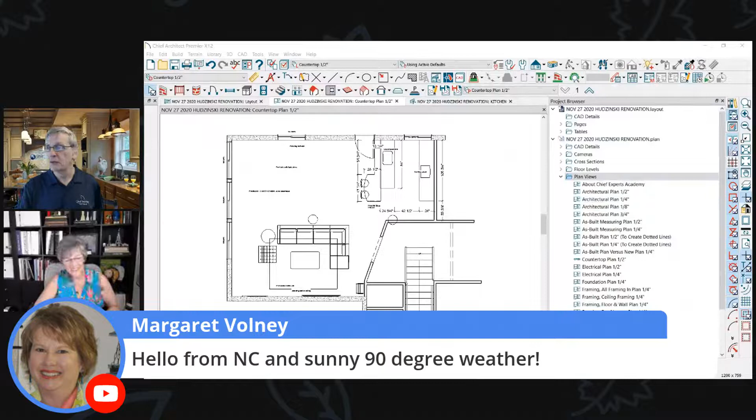I understand, one of the cool things about teaching the software, one of my comments I think I use too often is that you weren't born learning. You weren't born knowing how to use the software. And the other thing to keep in mind is right now there's over 1,200 different icons in the software, and that doesn't even include a lot of these pull downs here that have other functions in them. So, and then you've got the plan views, you've got the layout views, you've got your CAD detail views.

There's a lot going on in this program now, and they keep adding things to it, so it's a challenge to keep up with. I mean, this is what I do all day long, I work on this software. And even at that, it's just like, yeah, I still find myself, oh yeah, I forgot about that, now I can start using it again. So it's just so many things going on in it, which is good and bad all at the same time. I remember back in the day when the program was a little bit simpler, we could have a 2-day class and I could pretty much cover everything.

Now, we barely scratch the surface when we get into a 2-day class. So it's just what it is, and we just keep working with it. But it's just phenomenal what it can do and how quickly you can crank things out.

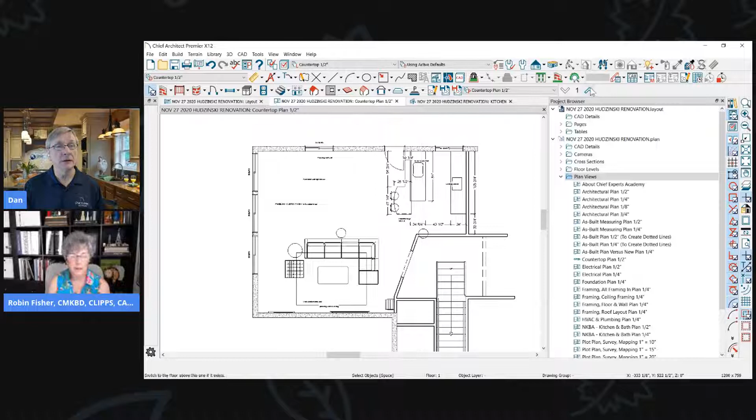So tell me a little bit about this plan. How did this plan originate? So this is a 1970s house with a daylight basement.

He's actually my integrator. When we moved into our house, we made it into a smart house, and Mark and I met at a conference a few years ago, and then he came over, and so now I'm doing his house, right?

So it's the whole main floor, the whole public space of the main floor, from the entry, living room, dining room, the kitchen, and then downstairs, which is a party room. So there's a full kitchen downstairs on the first floor, and on the basement level is a full floor, working kitchen and everything. She's a huge cook.

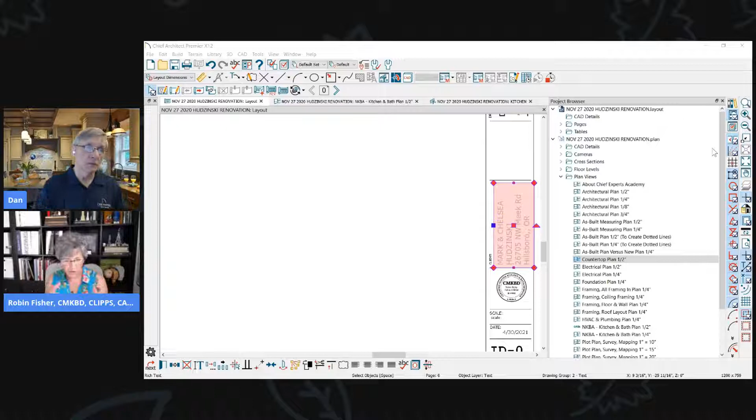She cooks all the time. It's a big deal. They have a small farm, so they raise a lot of their own fruits and vegetables. This is totally an Oregon thing, right? Mm-hmm. They raise a lot of their own foods, so they're really big on canning and preserving food.

So the downstairs kitchen is more where she does her canning in the summertime when it's really hot, but then they do entertain a lot. So it's a whole full working wet bar downstairs. And then upstairs is a really detailed functional kitchen.

All right, cool. So you came into this project. What were some of the... we've been talking about this quite a bit lately. Robin's actually going to start doing some kitchen classes with Chief Experts Academy with me. So I'm really excited about that. Looking forward to do that.

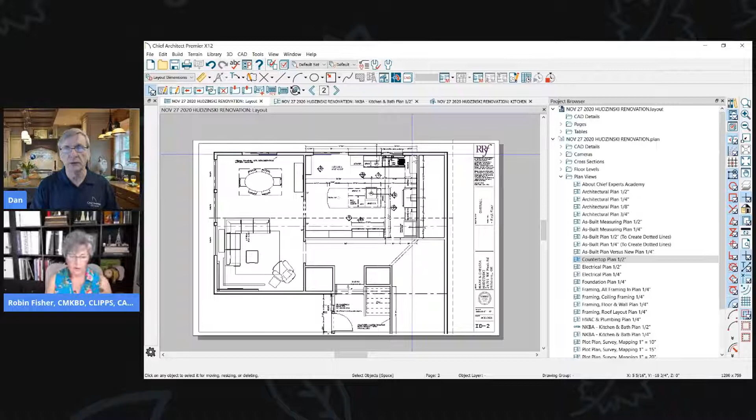And part of what we'll talk about in some of those classes is the mindset of what you go into these projects with. What do you think about when you meet a client and you go, 'Well, let me just design this wonderful kitchen for you and you're going to like it, right?' Isn't that how it works? No, not really. Not quite.

But so where do you start in that thought process? So prior to me meeting a client for the first time, I knew Mark pretty well beforehand. But before I meet somebody, first, I do a lifestyle questionnaire. So I send them an email with it, it's about a 6-page questionnaire, and it's really dealing with lifestyle issues.

Okay, how do you grocery shop? What kind of physical limitations? Is the house expanding or contracting? It's really not about pretties. It's not about how I want the space to look. The space to look is either Pinterest or Houzz or whatever. Okay, it's a contemporary style home.

So do you do this the first time you meet a client? Take their address? I should more than I do. I typically just go to Zillow or something like that and look at it that way. But I don't go to Maps as much as I should. That would be a smart thing to do.

I do that, because I work with a lot of clients all over the country, all over the world, actually. The first thing I'll do is get the address, and then I can go look at the house and go, oh okay, now I get it. Now I've got a much better idea of what you're talking about.

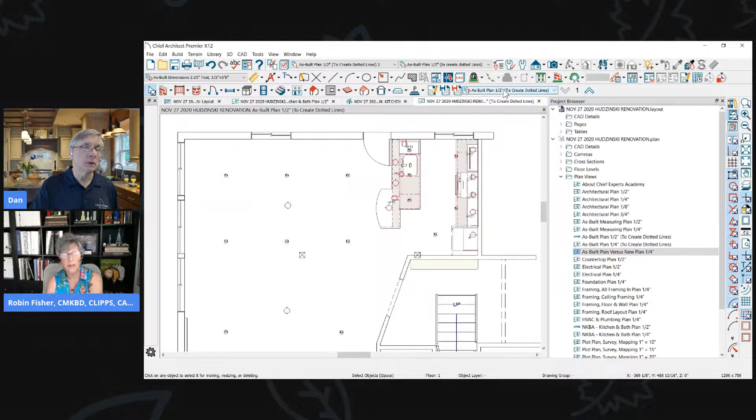Okay, but it was a really horrible kitchen space beforehand. And I don't have the before picture. I mean, I can show you the before pictures if you really want to see them. No, that's all right, we don't need to get into that kind of detail here.

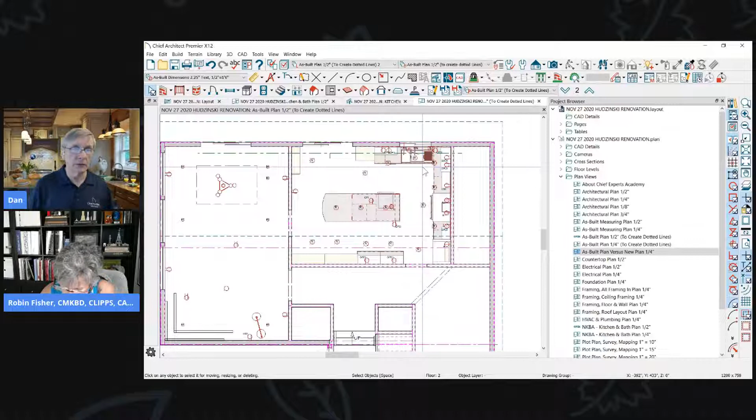But what I was asking Robin about was to look at the as-built layout. Let me show everybody this really quick, how that works, because it's really a handy thing to have in your plan. I wish I would have caught that early on - I would have asked you for that existing plan so we could put it in here. But let me just go open a new plan.

If you guys aren't familiar with how you do this, it's really slick and cheap. There's a couple different ways to do it - I'll show you the way I always do it. So if you have a plan and you've gone out and measured the building, and if you're working in my template, which I offer as part of my classes, or you can get it from my website, I have a thing here called as-built measuring plan. So you go on here, and...

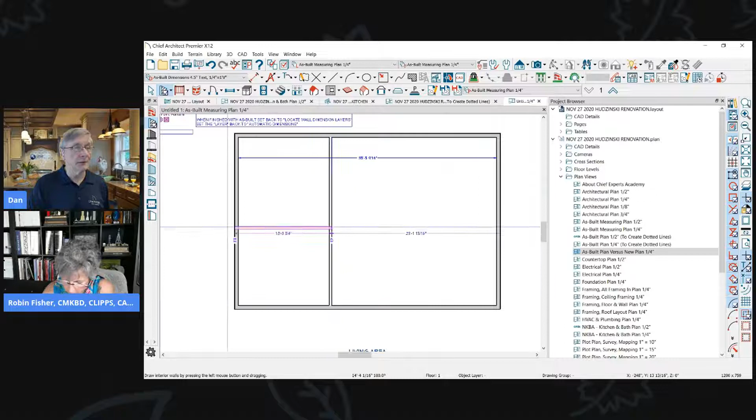That's going to allow you to measure from surface to surface instead of framing to framing. It's going to put the text on a different layer, and the notes on a different layer. So what you do is measure the existing building either on site or get your notes and come back to your office, then finish doing that as-built plan. You're going to put everything into plan, add your notes, add your cabinets - whatever it is you want to have in your plan as part of your as-built drawing.

Once you get to this point, if you don't have my template, the next step is to create a layer set where you turn everything off. I've got a layer set here called as-built plan to create dotted lines, and here I've turned off all of the dimensions, the text, the wall layers, the trim - all of those different things. Next I'm going to highlight these cabinets, open them, and remove the fill style so there's no fill in those cabinets. Now I've got a nice, clean, simple plan.

I'm going to convert that to a CAD detail right now using CAD detail from view, and we'll click on that. Now we've got a bunch of lines. What Chief does is put a CAD detail in this little area called the CAD detail window. I'm going to click on that, rename it, call it my as-built, and then I'm good to go.

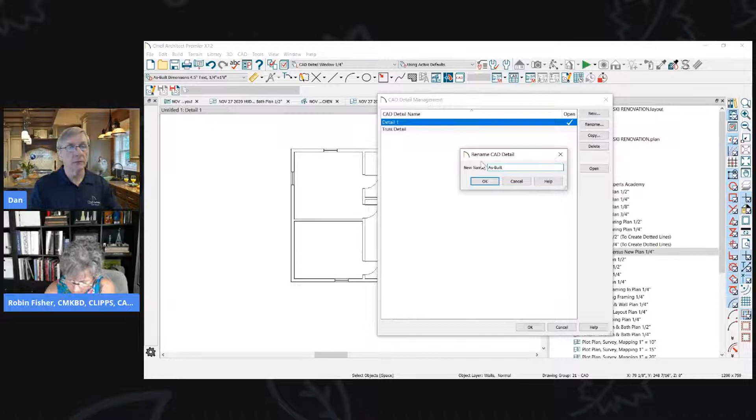Now there's a couple more steps - it's really simple once you've done this a couple times. I'm going to highlight all the CAD lines, open the dialog, and make sure I'm on the right layer. I've got a layer set up called CAD as-built dotted lines, which you can just set up yourself - it'll be a blue dotted line, or red, or whatever color you want. Then I make sure these three check marks are on, and I make sure this drop down says to back.

Okay, so that's really all you have to do to the CAD lines. Just make them look like you want them to appear in your as-built, in your demo plan, I guess we could call this. Then I'm simply going to take this and copy it. I'm going to go back to my floor plan, paste, edit, paste, hold position. Put that back in my plan. And when you're done, it should look like nothing changed.

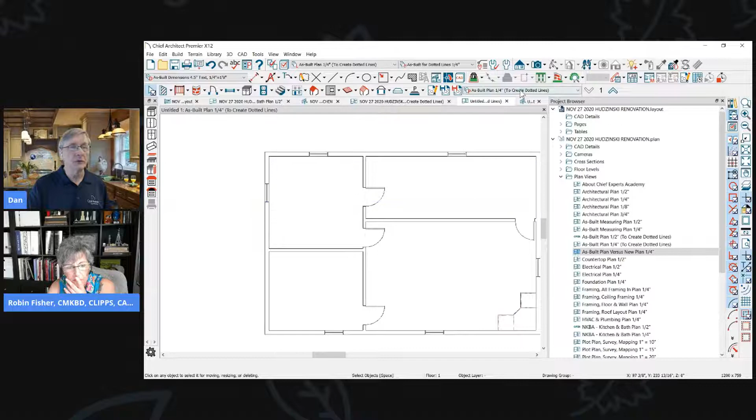But now as I switch back to my plan to start working on it, when I move some walls, there's the dotted lines. If I move a window, now I can see where the window used to be. So it puts all those items in there so that with the click of a switch in your layers, you can turn that layer on and off, the as-built CAD lines, and instantly see what's there. So if I remove a cabinet, I can say, okay, there used to be cabinets there.

So you can have as much as you want in your as-built plan. Just a little FYI for you on how that works. It's pretty slick, pretty easy once you get it down. The important thing is finish your as-built, then do this, and then start making your changes. All right, I just wanted to show everybody that.

That's great. And normally I do have my as-built as my first drawing, but I know you do, I just didn't send it to you. It would have been nice to turn on the blue dotted line layer here to see where things used to be, to see how much change you made to this plan. Anyway, just thought I'd show that.

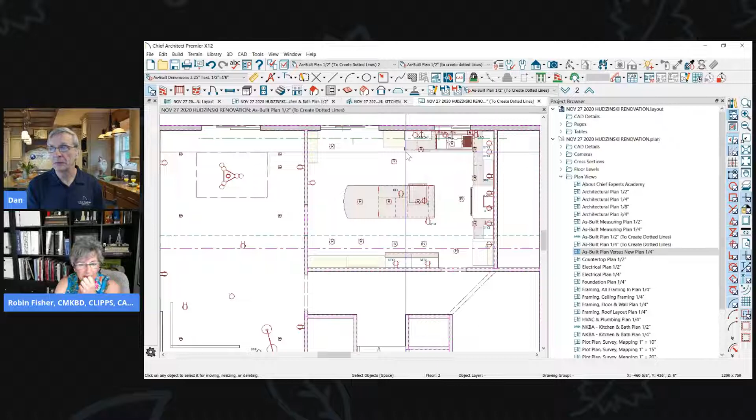All right, your screens are blurry. They are, huh? Whose screens are blurry? Is this screen where I'm showing you Chief Architect blurry? Anybody seeing that here, let us know. Looks good to me. Yeah, it looks good to me too. So hopefully it's not just an internet thing. I have really good internet here, I shouldn't be having this problem. Anyway, yes, the plan screen is blurry. Non-fuzzy's fine. Looks okay, looks okay, very clear. All right, so Margaret, I'm sorry. Maybe pop out of the meeting and come back in, or if you're watching on Facebook or YouTube, you can click the video on the web page if you're on my website, and that'll take you to YouTube, you could watch it there.

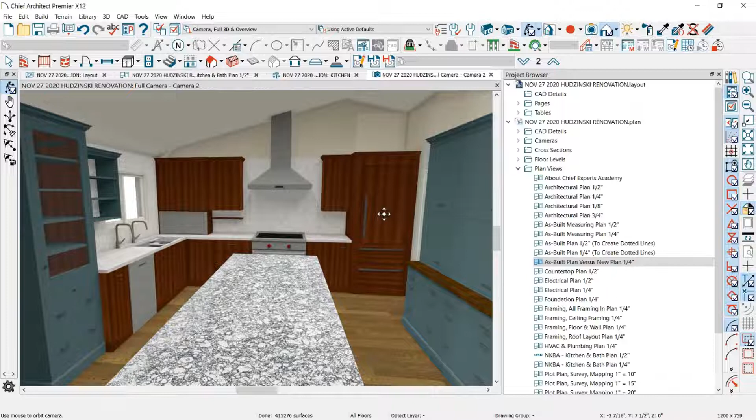When I meet with clients the first time, I already know a little bit of information about them ahead of time because they have created this questionnaire. And then when I come into their home, it's more about looking at what they own, you have to be a little snoopy. You have to look and see what's inside all of their cabinets, how many gadgets and accessories they have. And then it's really a conversation of how do you work in the space? Who works in the kitchen? How do they cook? What do they do?

And so I work on this concept of work centers. Each part of the kitchen has a task. From the sink to the left part of the kitchen, to the sliding door, is what's called the cleanup center. That's where the sink, the dishwasher, and all their dishes go, and cutlery and towels and Tupperware containers. And then we have the prep and cooking center, which is between the main work part of the kitchen, the refrigerator, the range, and the sink.

Now let me step back on this: I'm really paying attention to how people cook and how every single thing goes away in the kitchen. So as I'm designing and talking to them about how they cook and what kind of space requirements they need, I'm actually deciding does this cabinet need to be a drawer or doors or rollouts, or what kind of accessories do I want to put in it. So you start thinking of those kinds of details right away. I immediately start designing, putting everything they own away. Everything is being put away and everything has a place.

So here's a little tip for everyone. If I click on this camera and open it and spin around in the room, you're going to notice that I go outside of the room at some point.

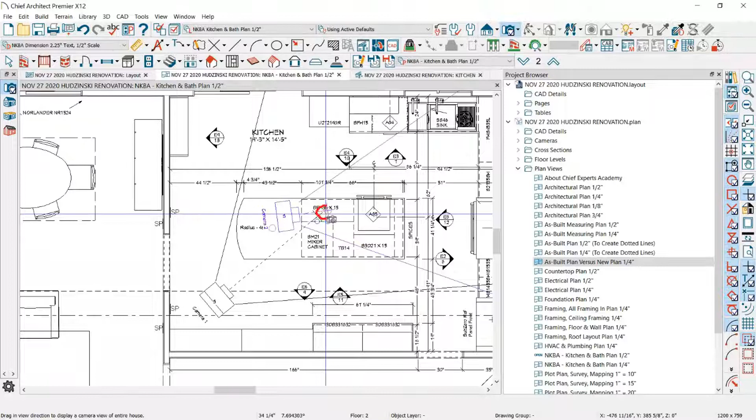When you're doing cameras in a room, you want to take a camera and go just a little ways, because the camera is going to spin around wherever you let go of your mouse. If you stretch this line way out, the camera is going to spin around from that point, and it's going to take a really wide spin.

So if you do it just a little bit, when I spin around in this room, now I'm spinning from the center of the camera. Let me tile the display here and show you what I'm talking about.

So watch the camera on the floor plan here, that's the one I'm looking at in this view. When I spin that around, you'll see how the camera moves, spinning around the end of that where I let go of my mouse. That's a really nice way to see the inside of a room without going off into some outer space thing. So that's just a little tip about looking at rooms.

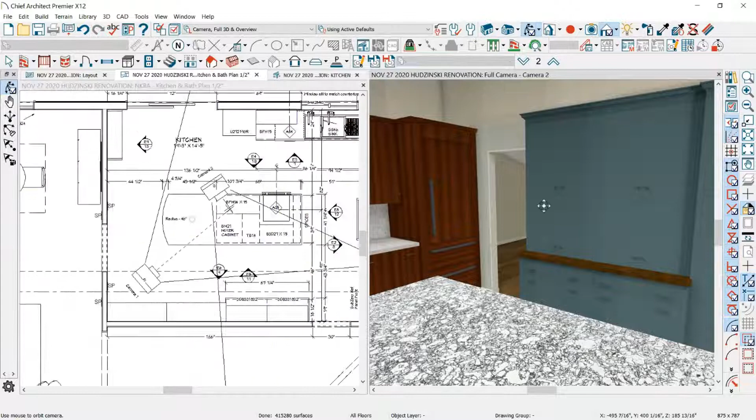When you zoom in and out, you see how the camera gets stretched in and out like that, and that'll affect things. When I spin now I'm going to be outside the building. Anyway, okay, so I'd show that one.

Keep going. So the kitchen part, the part of the kitchen where the main work triangle is between the refrigerator, the range, and the sink, that's where the major part of the cooking is going on. But then it's a conversation about what other tasks are happening.

So these people do lots of canning. Yeah, these people do lots of canning. They do lots of entertaining, when they can entertain. So that's where we need to figure out how the rest of the space needs to work. They do a lot of big projects, so we needed a really large island.

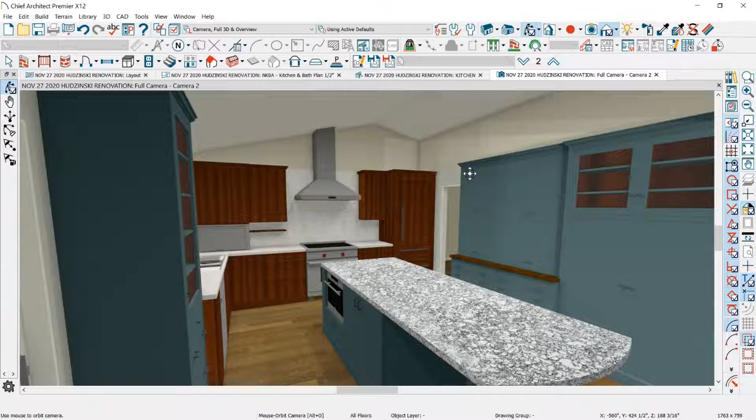How many different types of cooks are there? You've got your person, the person you told me once you designed a kitchen for who said, 'Yeah, whatever, I eat out every meal.' They just wanted it really pretty. In fact, I actually threatened them - I said, 'If you don't cook in your kitchen, I'm going to come over and cook.' And I ended up being the first person to cook in their kitchen, and it was months after it was done.

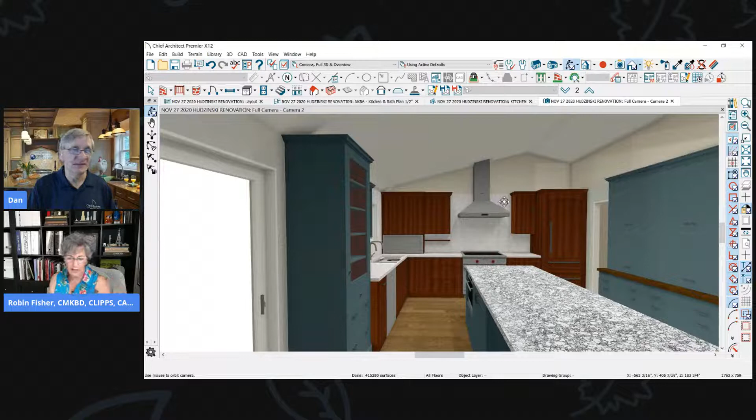No, I think the majority of people, when life is back to normal, the majority of people cook. I always say this: you cook for fuel Monday through Thursday, and then Friday, Saturday, Sunday is passion cooking. I think that's the way a lot of people cook.

Unless you're like me - it's my relaxing thing. When I get home from work, I like to cook because it puts me in the right brain to relax. But not everybody's like me. That's kind of weird, but most people have the same needs in their home, and especially in their kitchen.

These people really cook. And part of my interview process is really determining how they cook, and then helping them to determine what type of appliances they need.

So they wouldn't be classified necessarily as gourmet, but they would be like dual cooks. He doesn't really cook - he does more of the grilling, but that happens downstairs. He does the cocktails and the beer, and all that kind of stuff.

But my first interview is really where we're talking, once I'm on the site, looking at how they live in the space and what their needs are. They have two children, so they need an eating bar big enough for their kids and their friends to hang out. She likes people to hang out in the kitchen, but she doesn't want them in her space. So that's why the eating part of the kitchen is towards the end - close enough to sit down, have a glass of wine, talk to me, but stay out of my way kind of cooking.

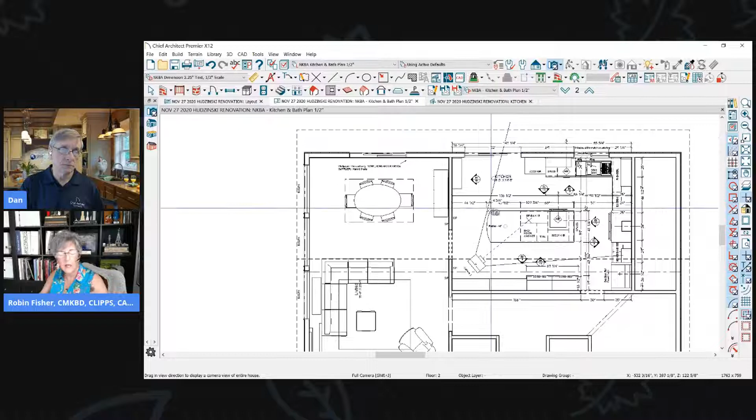And so they needed it big enough for their kids to have friends come over and all that. And then it's also a conversation about how do they cook and what their needs are. So then we're already talking about appliances.

So most of my kitchens end up being a Sub-Zero Wolf kitchen because they're American-made products. They're high quality, they function, and they're really good for people who actually cook. And the value is there. To me, the value for those appliances is amazing.

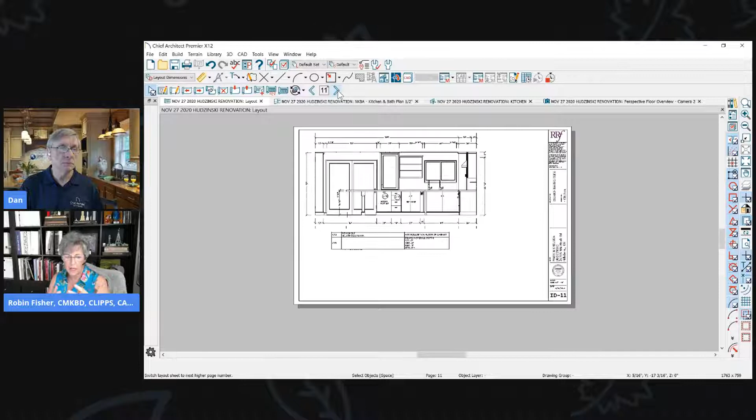So anyway, I start talking to them about different types of cooking. Do you need gas? Do you need induction? Do you want a steam oven? What size refrigerator do we need? So we really go through and spend a lot of time discussing what their needs are, and then I can start putting together a design.

And of course there's always a budget question. Yeah, there's always that budget thing. Oh, that's the hard part, right? Yeah, they want the $100,000 kitchen for $50,000. It's like, oh boy. But here's the cool part: he's an integrator.

So if you guys don't know what an integrator is, he does all high-tech smart home design. So he's used to working in homes in the $1 million range, so he gets the quality. It was a little hard getting her on board with it because she doesn't deal with the high quality stuff on a regular basis like he does. So he's already totally on board with product and concepts. That was a little bit different.

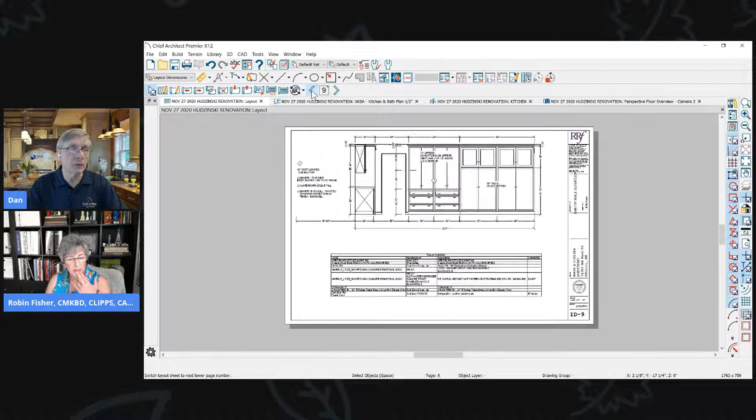And normally there's usually one person in the family who's more on board financially with the budget, and the other one - there's always one person that's more on board than the other.

That's pretty typical. So as I scroll through your plan here, I'm asking, well, where's the 3D views, man? You didn't put any 3D views here. Not on the plans - my contractor doesn't want them.

Yeah, is that very typical? You find that for a lot of your contractors you work with? Yeah, my contractors don't want 3D pictures. They said, why are you wasting my ink and why are you wasting a piece of paper? They don't want to see it. I can send it to them - I send it to them online.

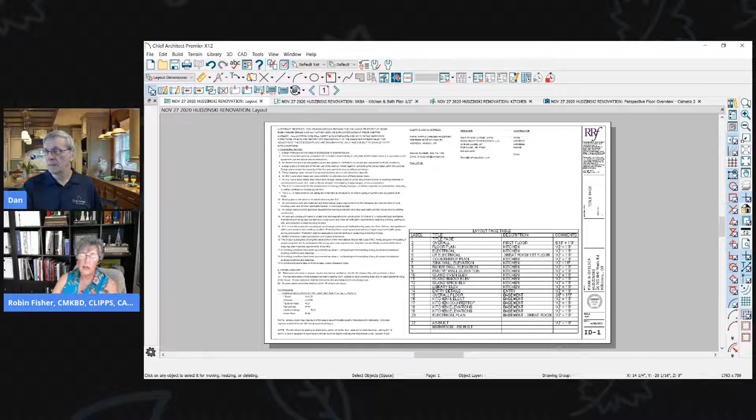That's more of a communication tool for me and my clients. And I really need you guys to understand, when I use Chief for the 3D part, it's really being used as communication. It's not necessarily - I don't spend a lot of time making them perfect. I make them look good enough, but you can see there's some crown overlapping at the back of my refrigerator.

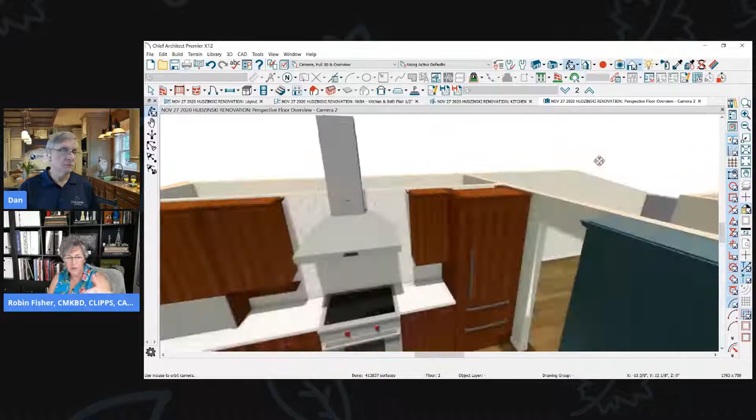That's not the way it's really going to be, and there's some little details that I just can't - I am not wasting. Here's the thing: my clients aren't going to pay me to waste my time doing that. So I am not going to spend the time making my images perfect.

Robin, it's fun to make it perfect. Yeah, I don't have the patience for that. No, this is good enough. I get it totally, I get it totally, and I'm on the same mindset.

And when I do classes often - you guys on the call, maybe you can relate to this too - it's just like, Chief's so cool that you could do really awesome things with it. You can change the materials, the wood grain, the patterns, the tile. You can get it perfect if you put the time into it.

So people say, well, let's do some really high quality renderings, I want it to look like photographs. And my first question is always, well, are you getting paid to do those kind of renderings? And 99% of the people say no, they're not. So because it can take a lot of time.

Now X13 is going to make that a lot easier because it'll be real-time ray trace, so that when we walk through the plan it'll look photo quality if the lighting is good. That's going to help a ton, because right now we have to go through ray trace and click the ray trace camera, then try all these different settings and wait 15 minutes to see if it looks halfway decent.

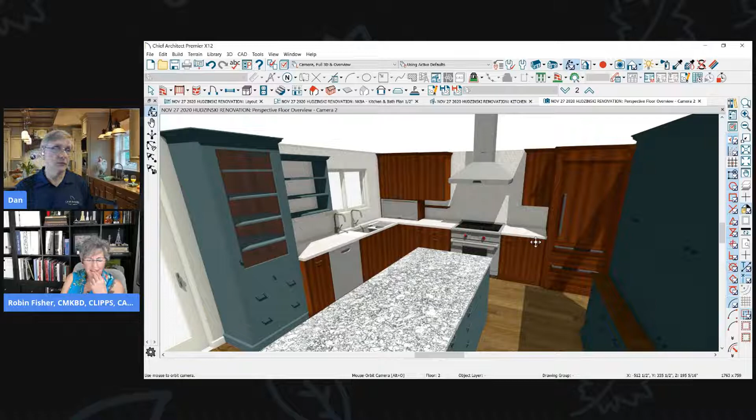And you could spend hours and hours. And if you want to do a really, really good rendering, you have to let it run overnight sometimes, and then you get there in the morning and go, oh, that didn't work at all. So it's really frustrating and tough. So like you're saying, don't waste your time doing super perfect unless you're getting paid for it, or unless you're that good that you can do it really quickly. Each project's going to have a different set of parameters as far as that goes.

I agree. Jeffrey and Alan said they use theirs and that it helps a lot. If I'm going to do a 3D image, it's not going to be color - I'm going to do it as black and white. Just convert it, switch to a vector view.

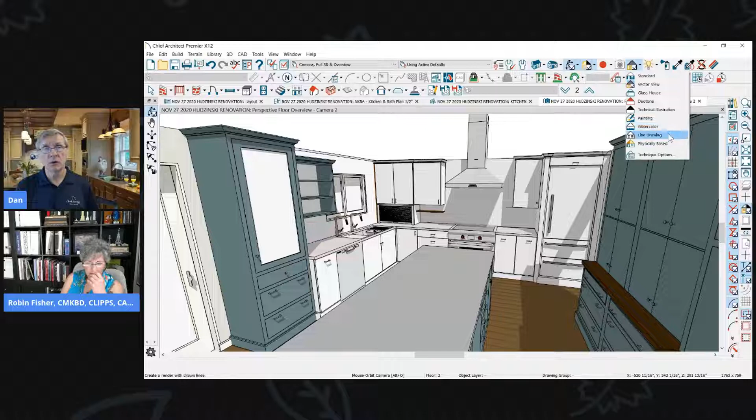One of the cool things in Chief is that if you switch to vector view, that's going to be a line drawing. And here it is, the line drawing in color. What you could also do, and what I like to do sometimes, is go watercolor. You could go to technique options - the vector view is what it is, shading with lines. But if we go to watercolor, you've got all these different settings.

You can also do the line drawing on top. There used to be a program out there called Squiggle, so you could set the amount of overlap on lines to make it look virtually hand-drawn, like it's colored in, like you took paint and colored it in. I'll do this sometimes on projects.

Just a little advice for you guys, or word of warning: be careful with high quality rendered views. Some people, if you show them to clients and give them to them - I've heard this story, it's a true story.

A contractor was installing the cabinets, and the client comes out with their paper and says the color of the cabinets doesn't look quite like what you're putting up. I really want the cabinets to look like they're in this picture. And that was a rendering. They didn't have any disclaimers, nothing in their contract or agreement that said renderings are just for visualization, not the real thing. Well, the client insisted, so they had to replace the cabinets with the color that matched more in their rendering. So that is a slippery slope.

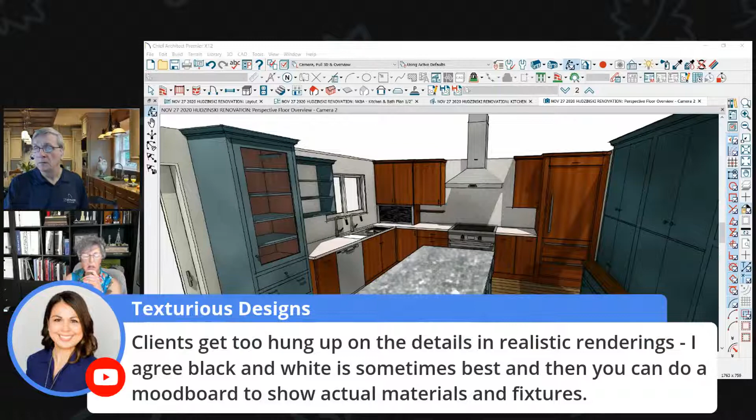I know of a contractor here in town who got sued because his 3D rendering didn't have a disclaimer on it. That's why it's better to do it like this. There's a pretty big remodeling company in Portland, Oregon, Neil Kelly - they're pretty well known. When they give their client a 3D rendering, it's done only in watercolor, and they put a big disclaimer on the front that this is only for design purposes, for aesthetic purposes.

It is not for construction documents. So on my layout template, I have this that I give as part of the template: '3D views not to scale, may not reflect exactly what's available. 2D views always supersede 3D.' So it's a simple statement, but it covers you. That's something to be aware of.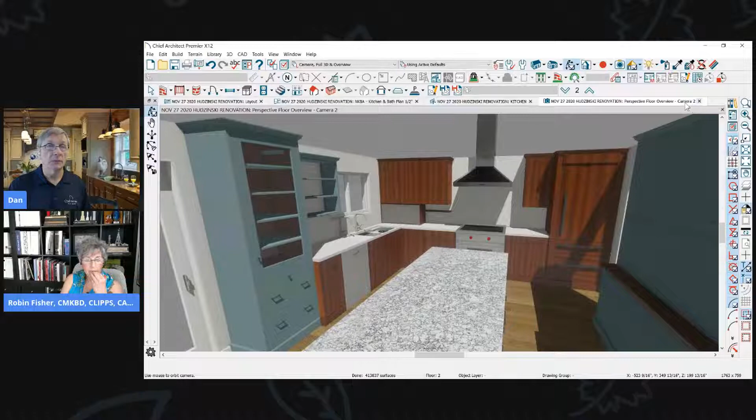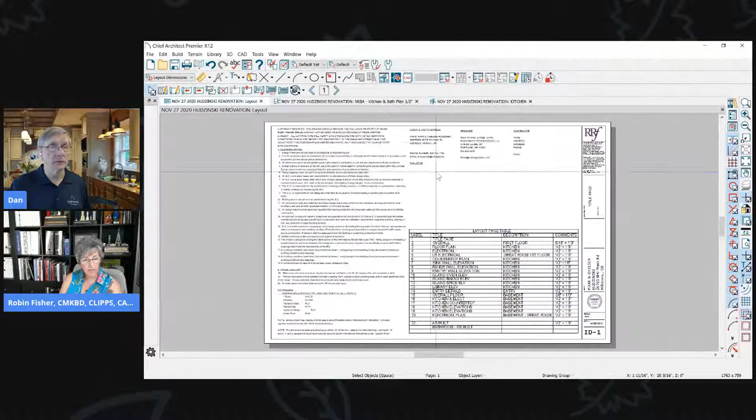I'll give you a little heads up on the next release - the line drawing part can go over any view now, I believe, and it's really fast. Right now, the line drawing on top of drawings is kind of slow, but it's going to be really nice. So the ability to make it look more hand-drawn is coming, and it's going to look a lot nicer. You can do that with any view, I think, except floor plans. You could do your elevations too, I believe.

So I noticed you, again, your kitchen and bath - you're an interior person, you don't do roofs. We talked about that a little bit yesterday, where you'll do plans like this and you wanted to show someone windows, and it would have been nice with roofs, but you don't do roofs. So whether you need to do that or not, it's up to you. This one does have a vaulted ceiling, so I noticed you did put a roof in the plan.

Yeah, I don't think it's exactly appropriate, I don't think it's exact. The pitch is correct - exact, the right pitch and everything. Yeah, I don't think it's the right pitch. Oh, actually, that is the right pitch, that I do know is correct. Yeah, but if you notice on the left-hand side, there's a little bit of a dog ear there.

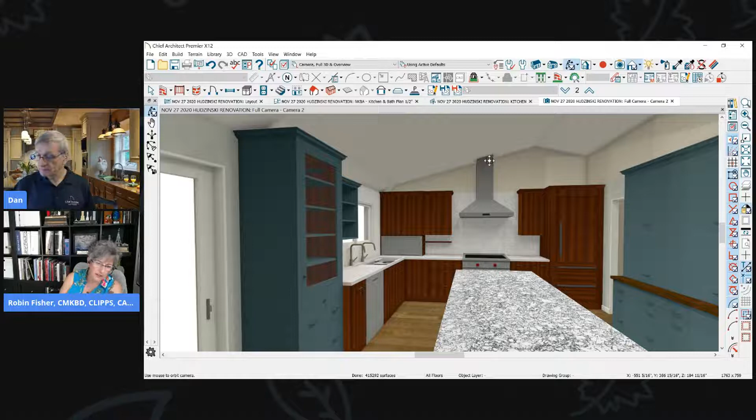If you look on my elevation page, on page 8, I put a little picture there to show that. Let's take a look at how you did that, because there are two ways to do vaulted ceilings in the kitchen or in any room in your plan. Actually, you did it by drawing a roof over the plan.

So what happened here is it's possible the ceiling height's too low. The ceiling is kind of climbing up and then over, although you do have the ceiling shut off, so it surprises me that happened.

Let's take a quick peek at the plan and open its dialog, and let's just change the ceiling height to see. Yeah, see the ceiling set to 93. So let's bump that up to 97.

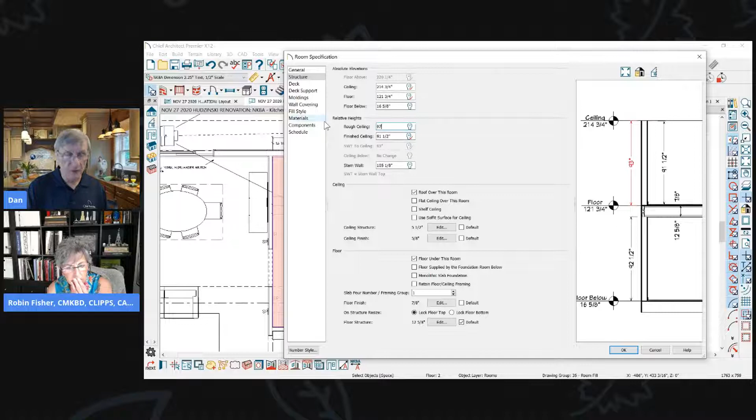Well, if we go 97 and an eighth, just an FYI for you guys that use Chief, 97 and an eighth inch ceiling height is a typical ceiling height for a house that has pre-cut studs with a bottom plate, 2 top plates, and 5/8 sheetrock on the ceiling. That is a typical number. So when you're doing your cross sections, don't change that to 97 or 96 just because it's a nice even number. Leave it at 97 and an eighth because that's what it should be.

As a person working out in the field, looking at that, that would make sense. Okay, so it didn't fix it when I raised it up. So there's something else going on here. I'm not quite sure what that is.

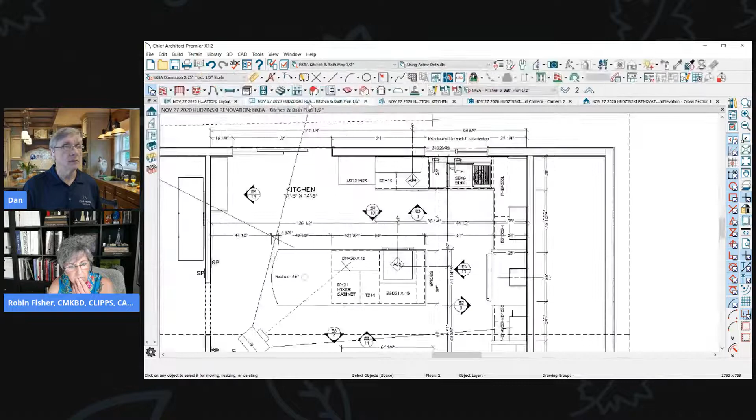But another thing that can be done with kitchens, let's just talk about that for a minute. You could use ceiling planes to show that vault as well.

And then again, when you're using, let's just look at this real quick. Let's do a wall elevation of that. You notice that the wall elevation ends there, so it's not showing the vault.

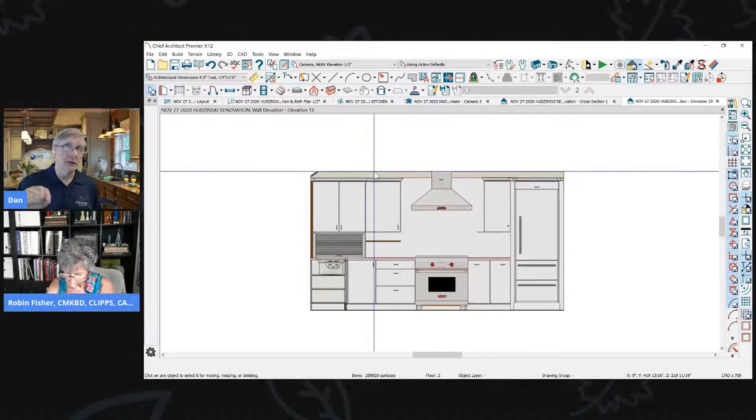In the next version, it'll show that, and you'll be able to adjust it however you want. In this version, what you would have to do is use this camera where I did a backclip, or I did a full cross section, or you could go back into the room and close some of the stuff.

And if I just raise the ceiling height really high, so if I just make it a 15-foot ceiling, now in that elevation, that flat elevation, it'll show the ceiling. I'm not quite sure why it's doing that. That is really weird. Yeah, I don't do roofs, I'm an interior designer.

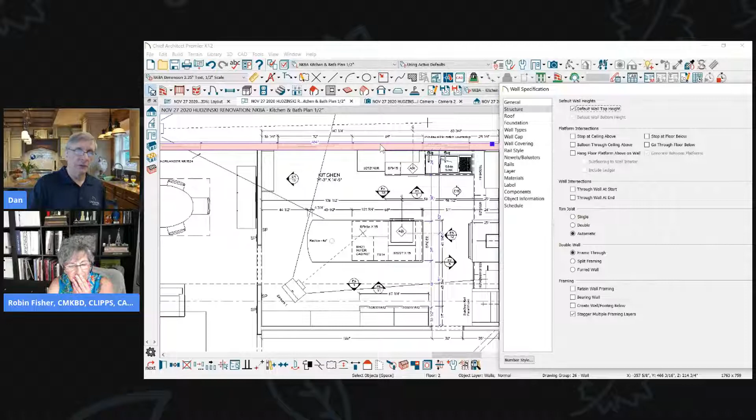Okay, let's readjust the top wall height. So what happened at some point is you clicked on that wall and pulled the top of it down. So at some point, walls interact with roofs.

So when you pull a wall down, it's not going to interact with the roof anymore. You remove the automatic set function with that. So I'm going to go to the wall spec and tell it to be default again, so now my wall will interact with the roof, and we look at a cross section.

Still didn't fix it, so there's something else going on here. What would that be? Anybody got any ideas what that might be? That is really weird.

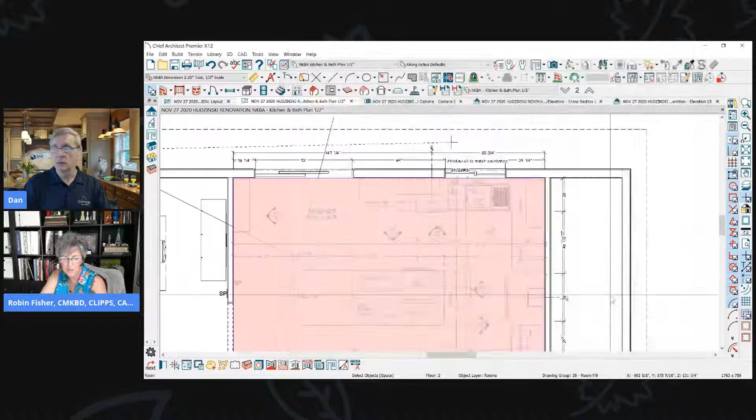I'd like to comment on something that Alan said, and he says that the danger is that most people have no clue what is going on in a 2D drawing. If you clarify and show them 3D views, they know what is to come. And I agree with that.

But Alan, to me that's client communication. So I use, and what I love about Chief is I use the 3D to be able to share that with the client. What I am sharing often is not something my contractors have told me, hands down they're just not interested. I work with the same contractors, I've worked with 4 people for years, these same 4 contractors for years, and they just said, don't waste my paper on it. They don't need it, they know what I'm asking for in design. So it works out just fine.

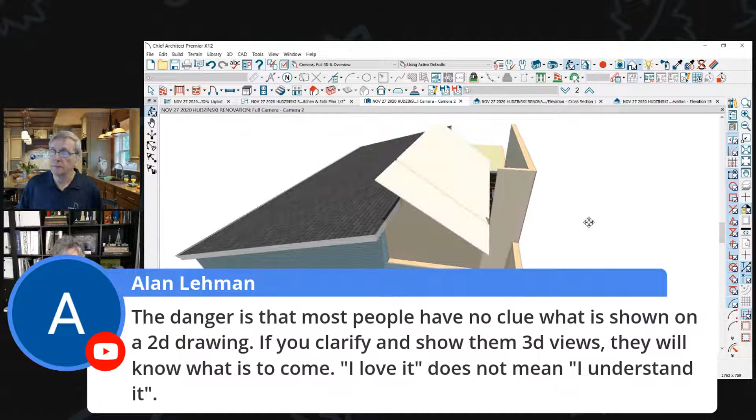And I'm not saying that's the right way or the wrong way, I'm just saying this is not what I do. I don't waste that, I don't have that time to do it. But I love the fact that the 3D is there and the clients can see it, and that's what's important to me.

I used to sell the Chief program years ago when they had a dealer program, and I would always say Chief's one of the best communication tools you have in your company. Next to your written specifications, but again, pictures are worth 1,000 words. So when you can show someone what it's going to look like, even if it's not perfect, it's close.

They're going to get it. The reason your ceiling was off like that is because you had put a ceiling plane in and a roof, and your ceiling plane was lower at that point. Okay, got it.

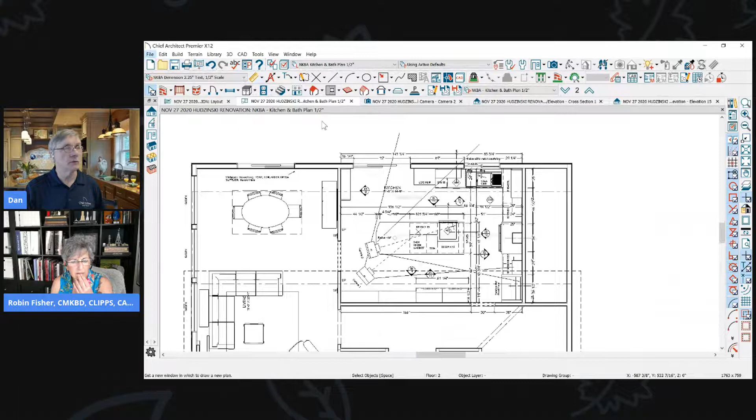So the only time you really need to use a ceiling plane—let me show you this real quick. When you're working on a plan and you've got your walls in place, you put a roof on. So let's say this is your kitchen, and you need to have a vaulted ceiling.

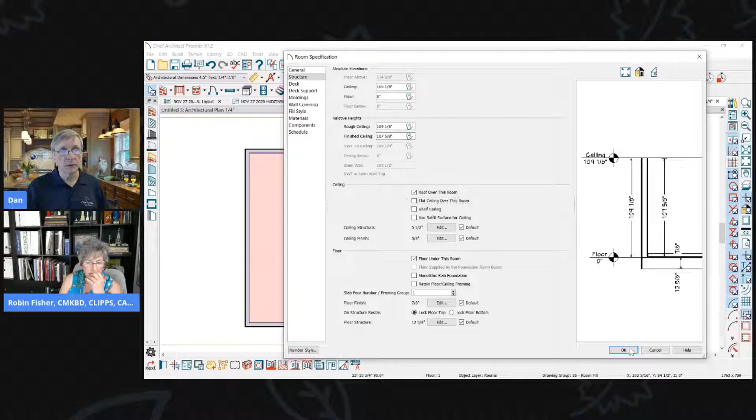I could go into the structure and just turn the ceiling off to start out. Click OK. And then if you go into a view, you could now start putting a roof on it from this view, understanding that as you add roofs...

So what I would do is click build a roof plane, and click auto build too. Because what this will do is you can start making changes, and it'll automatically show the change there. So turn the auto build on.

So if I needed this to be a gable, I'm going to click on this, and there's a little icon down here that will turn that wall into a gable wall, so that I can make it look like that. And then it's like, okay, well, this wall has less of a pitch than this wall.

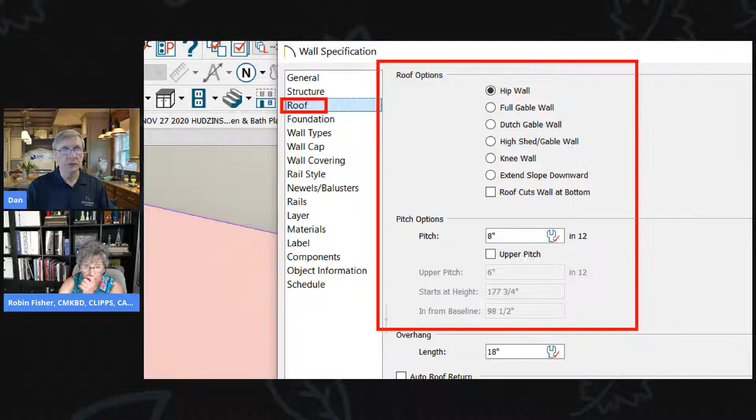So now I can click on this wall and go into the roof tab. Under the roof tab for a wall, you can do things to the roof above that wall. In this case, we could put a different pitch in that wall than the other walls in our plan.

So just above this wall, I want to have a 4/12 pitch. When I click OK, because I have the auto roof build on, it's going to show me that pitch. If I were to measure that from the top to the floor, the roof gets put where it's initially determined by the ceiling height of the room.

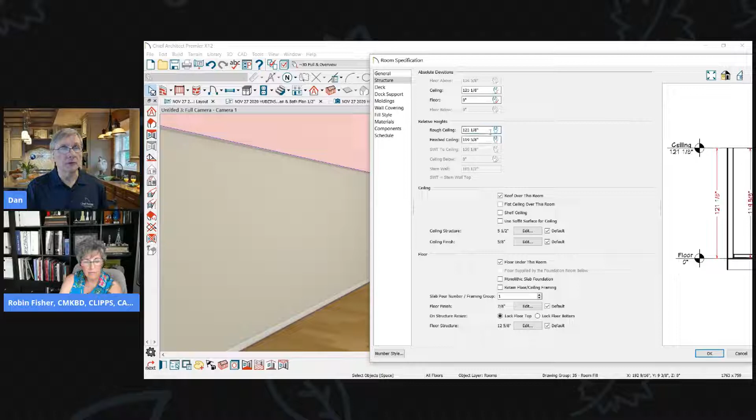You can change it manually anytime, but we're still in the automatic setting phase. If I go in here and say the wall is a little bit taller, I could change the ceiling height of this room—say I put plus 12 inches. For those watching, you can put minus 12 inches or plus 12 inches; it acts like a calculator. Just add that number and it'll put it in and out.

So now it raised that up. Now I've got a taller wall. Of course, this wall is going to be taller as well, but that's just how it works, so you could do that. Now, the other thing you could do is use ceiling planes, and that's what you had in your plan—you had a ceiling plane and a roof. So at some point you had done that.

Let me go in here and I'll show you that real quick. And again, you don't care about the rest of the house—you're just trying to get the kitchen to look right. No, just interiors, exactly.

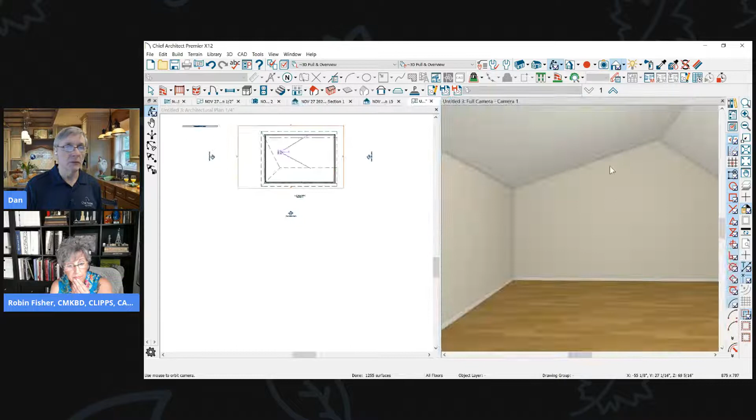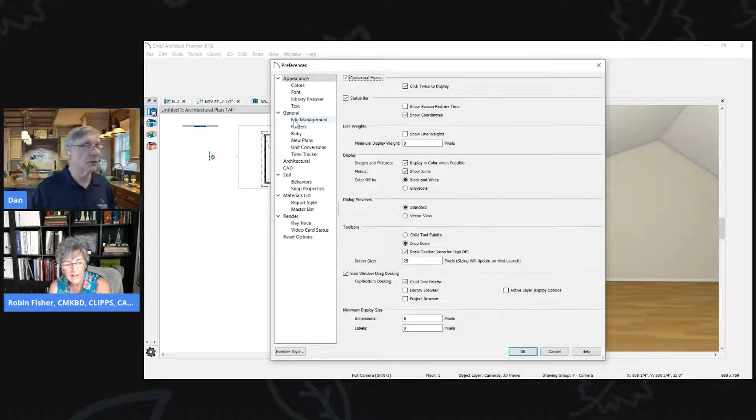So again, I just grab the tab and pull it down, and it tiles the display. My toolbar just blew up. This happens—that happened to me yesterday too. It's been happening to many people, especially when you're in a Zoom call; it was happening to me with GoToWebinar yesterday. Very frustrating. I'm not in a Zoom call, this is StreamYard. So I'm going to go to reset options—hit my preferences, hit reset toolbars, hit OK, and then I'm going to have to get out of this.

So let me save this. Let's call it a demo plan. Yeah, release that one. Save that. Sorry, guys. Okay, well, I can. Oh yeah, okay, go ahead.

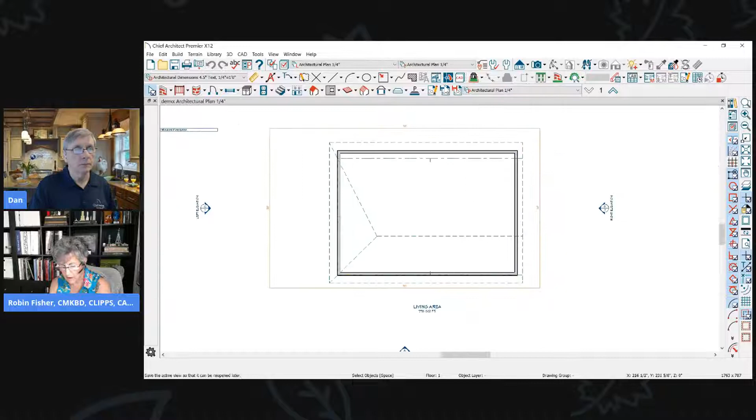Keep talking. Well, I was going to say that one of the things I love about Chief is how I look at when I'm designing kitchens. I really try to make sure that when I'm designing a space, I use the program to give each one of my tradespeople the right information on each page. So I do have written specs that are not on my drawings. My contractors have asked that specifications be a separate document. Because when I do specs, I'm selecting everything for the house, like everything, right? So, but when I'm designing a space in a room, I'm automatically mentally and physically putting things away in every one of my cabinets.

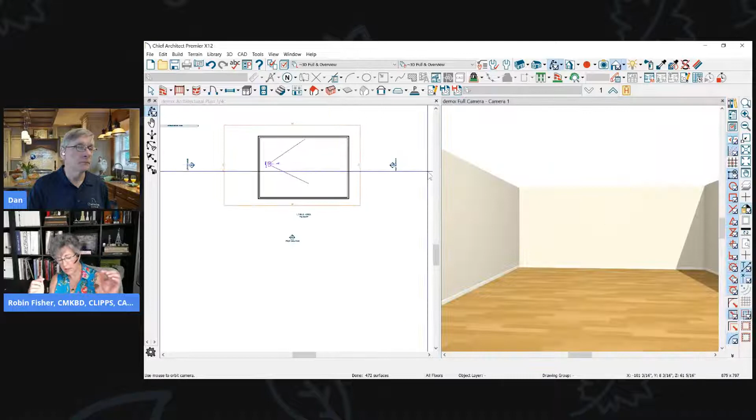So I work with Rev-A-Shelf a lot, and what I love about Chief is that Rev-A-Shelf is an option I can put into the drawings, and I create schedules for every elevation page that show exactly what's happening in each cabinet. So it makes it easy. I work with custom cabinet shops, so my cabinet shops can open page one and see everything happening in every one of those cabinets, all the accessories. My drawings have a lot of schedules on them, which I find really helpful for everybody so they can bid things easier.

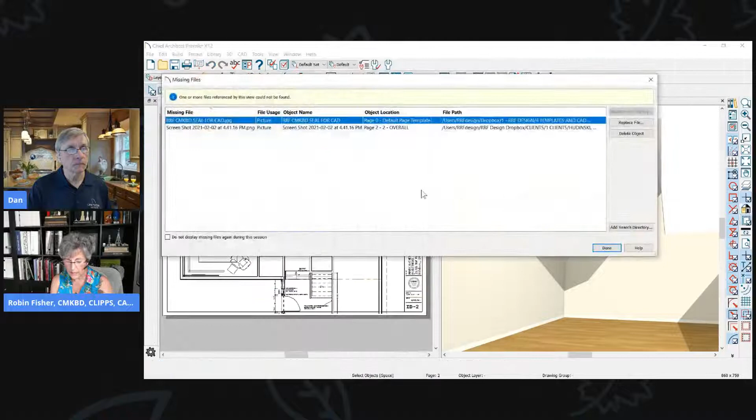I want my drawings to be, my construction documents are just that. My drawings are construction documents. They're things I use for all my trades. And every time I create a drawing, each one specifically has my trade contractor in mind.

So like this kitchen has three different countertops, so I do a countertop plan. If I do a custom soffit detail, I will do a soffit plan. So I end up with a lot of these interior plans that are very specific for tradespeople. The countertop plan was really helpful - it's just one thing I can give to my countertop installer.

I do collect a lot of bids for my contractors. They'll tell me what subs they want me to send drawings out to, and I'll immediately send out the appropriate pages to each of those tradespeople and collect bids for them. I find as the designer, I'm their support person, so I help my contractors as much as possible and make sure the plans are very specific to each one of my tradespeople.

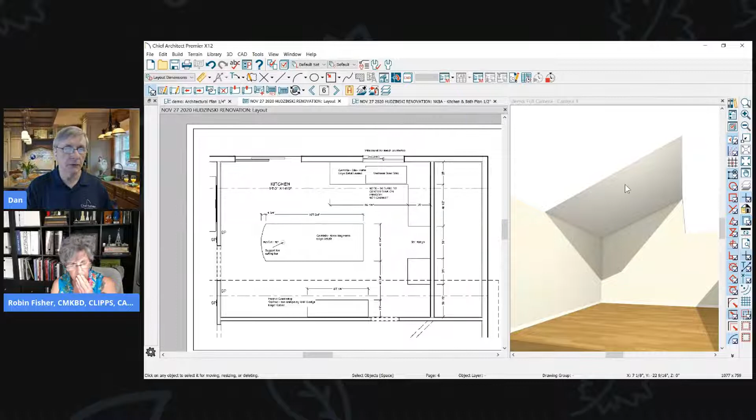So let's talk about how you set up this countertop plan. By the way, I was just going in here, and while you were talking, I showed how to do the roof plane. So I'll just highlight this real quick for you.

So what I did - here's your room, this is going to be your kitchen. You go in and turn the ceiling off. So you're always going to have the ceiling off whenever you have a vaulted ceiling. That's under structure, flat ceiling is going to be off, okay?

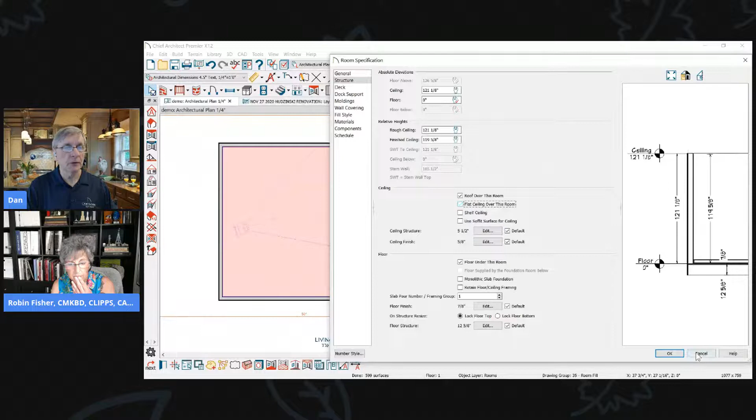And then double click on the roof icon, and you're going to set the pitch that you want to draw. You can change that, but if you start by doing this, you can draw it manually for whatever you want.

And then Chief has a tool here called the ceiling plane. So you just draw a box, you draw a line. Okay, so I'm drawing a line. Now I'm moving my cursor toward the ridge, and then I'm going to click, and you see how it added...

Just a plane - it's not a roof, it's just like the ceiling of the room. And then you're going to use this tool here called join edges. If I click on this ridge and this ridge, it'll join it together.

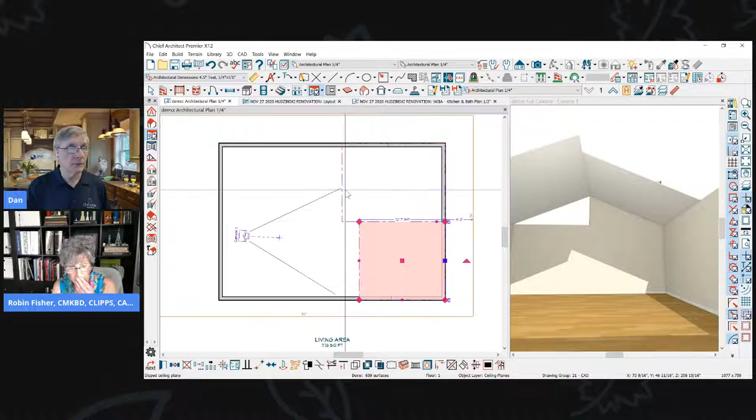So the roof tools in Chief are phenomenal. You can design anything you want. They do a great job, and it's just a really nice way to get those kinds of things into your plan.

Why it's not doing my wall there, I don't know, but I would stretch that through and go like that, and I'm done. So there you go.

And at any time you can open the dialog and say, I want that to be lower, I want it to be higher, I want it to be a different pitch, I want to keep the bottom where it is, and I want this to be a 3-12 pitch. I click OK, and you see how it slopes it down.

Then I simply have to use the join tool to put the edges back together, and I've got to click on the right edges. So do it from the floor plan.

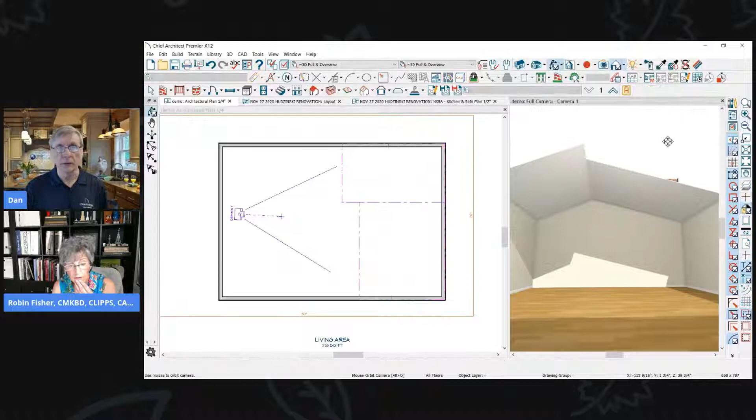I'm going to take that class. It's totally worth it. I want to know how to do all this stuff. Yeah, and so many things apply to so many things throughout the program.

The way you add a countertop to your plan is the same way you add tile on a wall, the same way you add a sidewalk and terrain perimeter, and the same way you reshape a roof. All of those tools, they're the same tool, but they do different things in Chief.

So let's talk a little bit about the plan here. Now you're using a thing called plan views. Let me get back into your plan. We're in plan views, and Dan, when I start drawing, I'm starting with a quarter inch plan, which for a kitchen, you're not going to do that.

So for kitchen, we switch to the NKBA layers plan view set, which turns on the kitchen. Actually, I changed the way I do it.

When I now draw, because my brain goes a million different ways at the same time, I now use the architectural plan for half inch, and I put everything on it.

I will put furniture in place, because a lot of times when I'm designing a space, I have to determine how much space I can't use. Like if it's a kitchen with a dining room in the same area, I have to space off how much space I can't use. So I'll throw a dining room table there and measure out the amount of space that I need, and make sure the dining room table meets the client's specific needs.

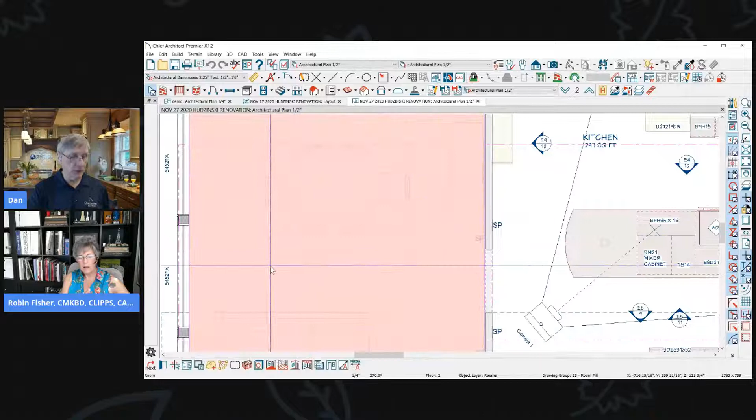This is a symbol that you got at Chief's library, called a group. What Chief has going on here is called a bounding box. So when you open the dialog for that, turn off the bounding box, and it'll get rid of those dotted lines. That cleans that up. The other thing you can do is ungroup it, so anytime you have a group of items put together, that little icon will explode it, take it apart, so now you can get rid of the furniture.

Do whatever you want to it. So, I don't need the chairs, but I do want the table. But that's totally fine.

A lot of times as I'm designing, it's like, oh, I really want a decorative light fixture in this location. So using the architectural plan, I can just throw everything on the plan at one point, and then I can go to specific layers. On my NKBA plan, I've turned off all my furniture. I don't want furniture on my NKBA plan. My contractor does not want bar stools on the plan, they don't care about it.

But my client does. So I will give my client one set of plans that are different than what my contractor has, or they'll have additional sets of plans. What I like about working in the architectural plan is I can put everything on, and then I can go to the specific plans that I want and take off certain things.

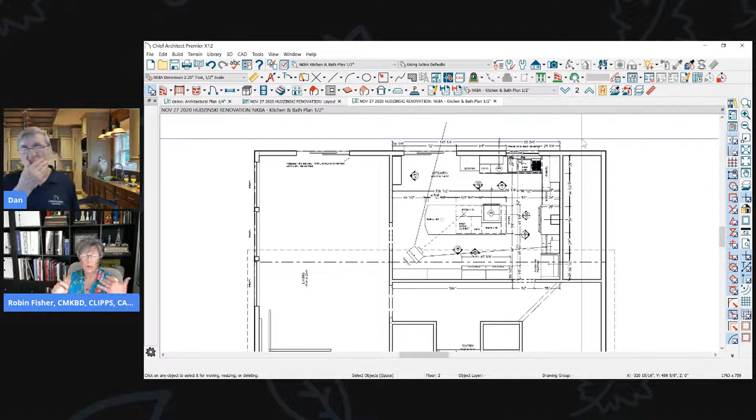I really like it. Like when I'm doing a furniture plan for my client, I don't have nomenclature on my cabinets, they don't care about it. So I can change all of that, which I just love, that I can modify it and make it work for me. That's the beauty of plan views, for your architectural plan you could turn things on and off. If you don't want those cabinet callouts, you could turn them off. I always like to put these little icons on my toolbar.

And there's one here called Layer Hider that I like to use. This is the only modification I ever make to a toolbar. That's it. Everything else is stock within Chief Architect.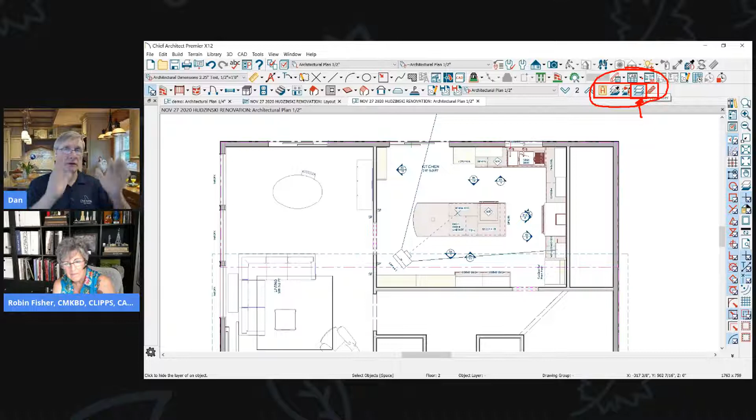So what I do here is you can right click on any icon and customize toolbars. And I go to tools, search for layer, and I'm going to pull my layer hider up here on the toolbar. I also have my layer eyedropper, my wall hatching, and the paste hold position is one you should always use. And then I put that right on top of the layer hider.

That's it, that's really all I ever do. So anytime I want to hide something, I just click on it and I click on that object, and it's hidden that layer. I have two that I do recommend adding, because I do mostly interiors, and I always add hide exterior walls when I'm in 3D, and I always add turn off shadows, because I don't want to see them. I have the toggle shadow off, so those are all available.

I add those two so that when I'm showing my clients exterior views, don't laugh at the exterior views, you guys. This is not an exterior project, okay? Interior design, so no laughing. It looks goofy, laugh at your plan. No, it's super goofy, right?

So what she was talking about with hide exterior walls - you want to go look at your kitchen, but you can't really see it unless you go into it. This is good for small rooms, it's good for your whole house. And of course I deleted the roof and stuff, so that's why it's extra messed up.

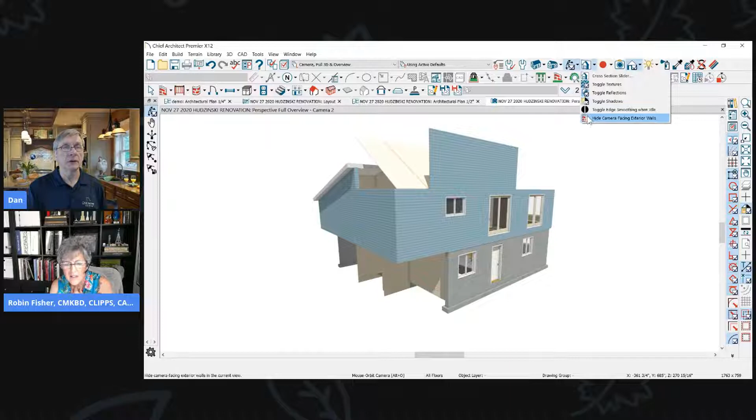So that's under this pull down up here. Where did it go again? It's right here. So you can hide camera facing exterior walls. As you spin around, it just turns off those outside walls. That's really a handy one when you want to look inside your model and your structure. It works really well, it really helps.

So then your shadows on and off - you could do that by clicking this little icon with the pencil. Is that the one? Yeah, so that one with the pencil, you could hit show shadows or not show shadows, but there's an icon for that too, to turn those on and off. I think the shadows are just too confusing, it's just one more thing that makes it hard for people to see.

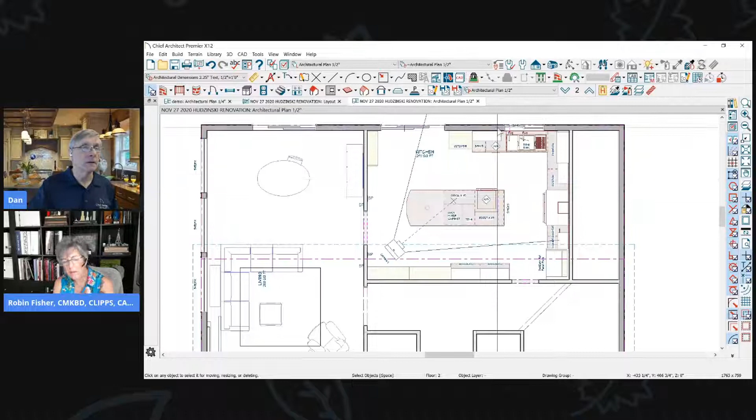But go to the layout page - this is what I think I'm most happy with of what I'm creating. You can just keep flipping, like page 8 or something. Go back one more page. I do a lot of annotation on my drawings.

Now I'm using things like - it's not necessarily a cabinet schedule, because I don't put all the details. I don't create a cabinet schedule because my cabinet people go through and list their stuff. But every one of these notes on here, I'm using notes to create them, and what I'm adding is what's happening in each of those cabinets. So what Rev-A-Shelf item I'm using, what accessory is happening in each space. And then I have an appliance schedule, especially for my cabinet people, who need to see all the schedules - they need to know, is that refrigerator having a panel on it, and what is the refrigerator. So I really try to make sure it's very clean and very detailed.

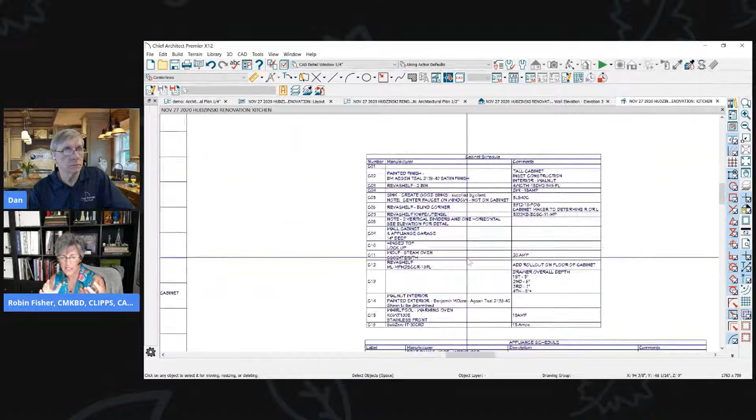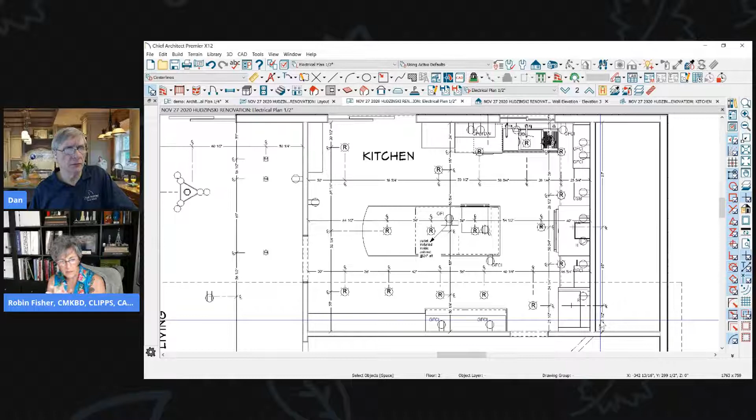I also specify all of my recessed cans, really picky about lighting. So in my electrical plan, on my schedule, all of my lighting is specified, like what is specifically happening with each item. You've laid out every can, dimensioned it, and got little notes for some of them. Yeah, so that's pretty cool, that's so important in these kinds of rooms - well, any room actually, but yeah, you've really detailed the heck out of it.

Cool, Danny asked how you got your toolbars back so quick. He had to turn it off and turn it on again - you have to turn off the whole program, and that's the only way it comes back. Well, first I went to edit preferences, then I went to reset and hit reset toolbars. Then I exited the program and came back in.

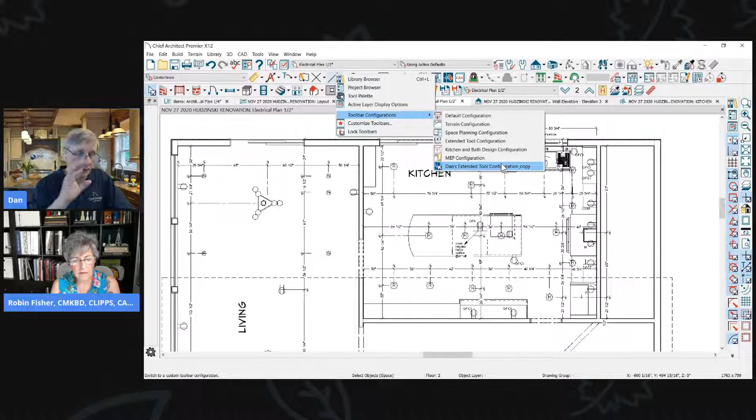It came back with one row of icons, and I went to customize, then to extended tool configuration. I also created a toolbar with my name on it that I keep in a different folder, moved from the data folder to another folder. So whenever it crashes, I just go to customize toolbars, go to toolbars, and import that, and then I'm back in business. So if you have a lot of tools you've added, remember to keep a copy somewhere else, in your documents folder, and you can find it that way.

So I'd like to make a point just for the kitchen designers in the room who are paying attention. We're almost out of time. I know we are, we're just getting warmed up here.

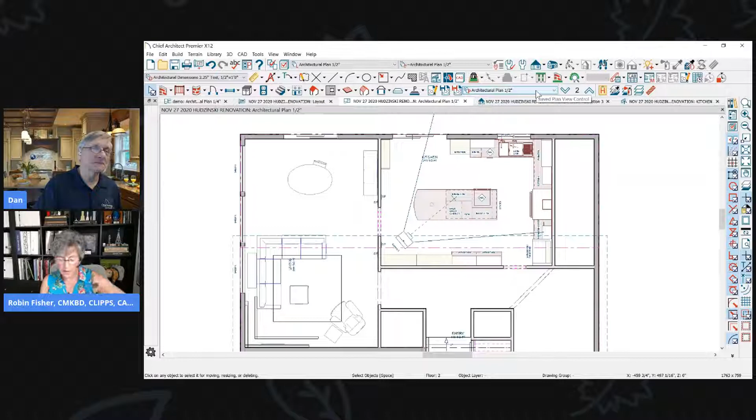I'd like to make a little note for those of you who use accessories, especially Rev-A-Shelf items in the cabinets. There's a way to add that information, the model numbers, directly to your schedule, which is really great. But make sure you're using the right ones. I don't get paid by Rev-A-Shelf, I need you to know that, but you can get a free catalog and they deliver it really quickly. If you go to their contact page, they'll send you an updated catalog, and the brand new one just came out. So if you're a kitchen designer, I really recommend you get the new catalog so you know everything that's happening inside the cabinets.

And I would assume they have catalogs online too. Oh, they do, but their catalog is archaic online, it's a pain to deal with. I can't believe they wouldn't keep it up to date.

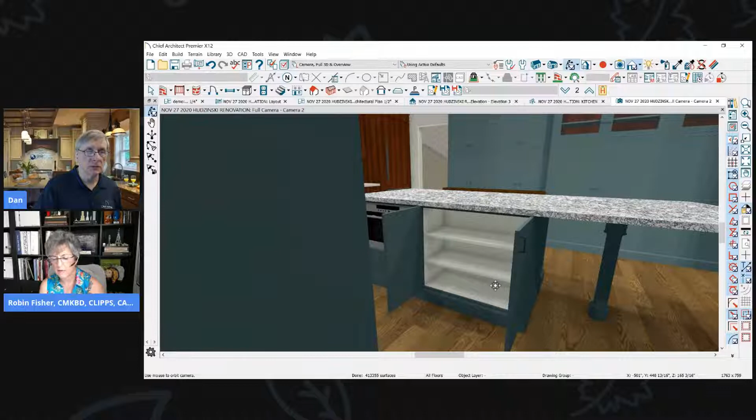But let's go add something to this cabinet, a Rev-A-Shelf thing, and then we're going to have to call it a day here. It won't fit because it's not deep enough, Dan. Nothing will fit in there because it's only 15 inches deep. No, but if you go to one of the other cabinets, there'll be something that fits.

What's the problem with Rev-A-Shelf is that you can shove something into a cabinet that might not necessarily really fit because of the specs. So you really need to have your catalog open, make sure you have the right size cabinet.

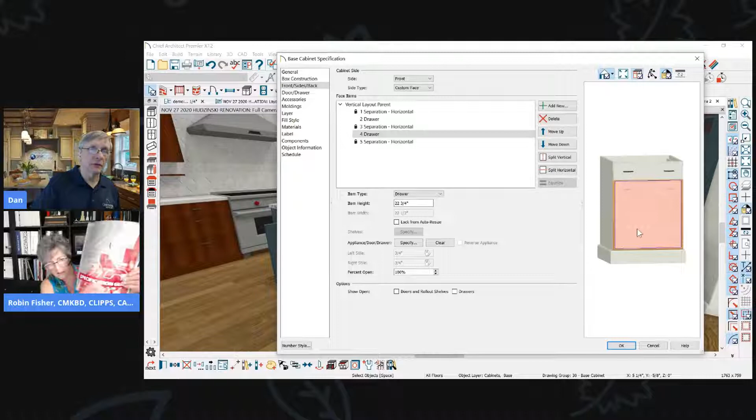That's so true. So for Rev-A-Shelf here, I'm clicking on this. Normally this would be a door, but I've converted it to a drawer now. So if we go to appliance, door, drawer, and specify, we could do this right here. This is where we go to the Rev-A-Shelf library, under the manufacturer catalog, under R for Rev. There's a boatload of stuff in this catalog, I don't know how many different things they have, but it's huge.

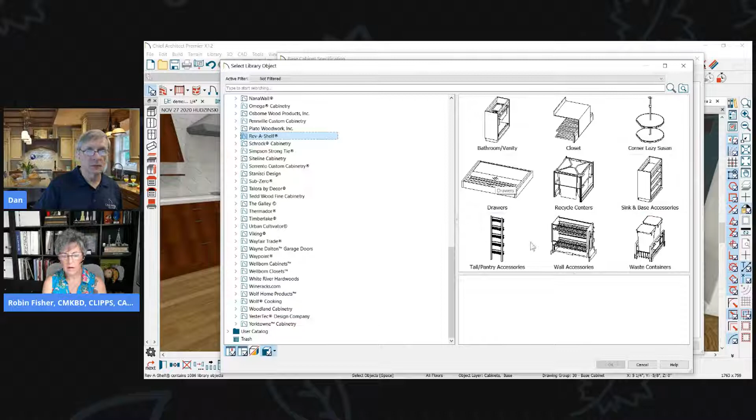There's just too many, actually look at all the things we have here, it's like holy smokes. When you click on some of these things, let's see, well, I'm just going to do that because we're out of time. You grab that, and now that's going to be part of this. Okay, click OK. And I could hit show open and drawers, because that's a drawer now, and it's going to show my Rev-A-Shelf thing.

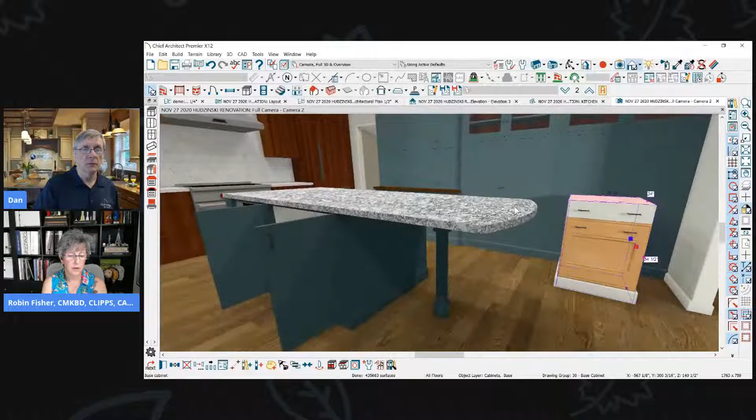But Dan, can I point this out real quickly? That specific item, if you use it, would not go into that format of cabinet, because it has a 50-liter or 50-quart trash can, and it would not be designed for that specific cabinet. So for those of you who don't know, Rev-A-Shelf is cabinet accessories, all the accessories that go inside the cabinet.

Chief has their library on their system for kitchen and bath designers, which is really great. But if you're doing a lot of them, here's the thing I need you to know: when I'm designing, I'm immediately putting things away, and I'm putting accessories in their cabinets. I tell my clients right up front that yes, it's going to increase their contract.

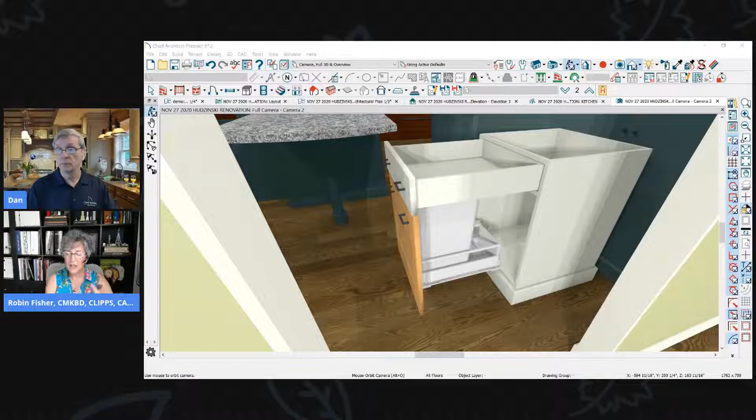It's going to increase their cabinet cost, but if I don't do it for you, you're going to go to the Container Store later on and put things in that don't really fit. So by having the cabinet maker put them in, they fit perfectly and they're organized properly.

So all you have to do is get the catalog. Their website's archaic, trust me on this. If you go to contact us, it's still archaic, with last year's data on the bottom. But if you go to contact us and fill out your information, it'll ask what you want, and you just ask them for literature. Seriously, within less than a week you'll get your literature and the catalog, and it'll make your life so much easier.

Just make sure you're putting the right information into it. That's a nightmare, I have no patience for that catalog. So it looks like you don't like this, but you like having the paper there. I know a lot of companies are going paperless, so at least you have that option. But that's where you go to do it.

So Rev-A-Shelf is a good thing, and I don't make any money off of them, you guys, just so you know. Well, you do sell clients this stuff, and you make money because you design better. There you go, so you kind of do. Just a little FYI for you.

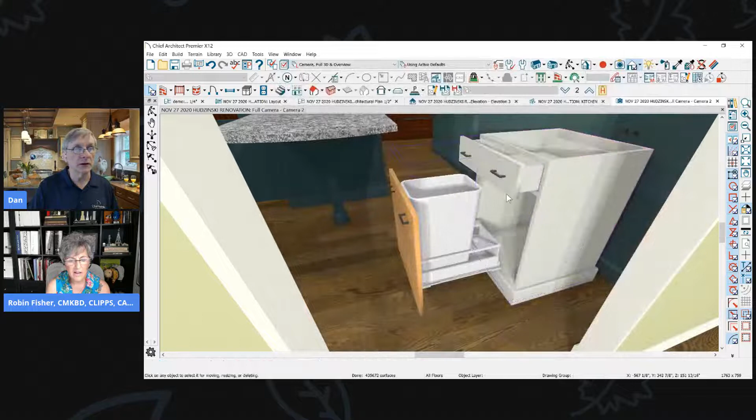I want to see this, but I don't want to see this drawer open. So go back into the cabinet itself, and we're going to click on the top drawer, and we can set percentage open for each of these items. I can make the top drawer open maybe 20%, and have more for the bottom, so now you can see the item that you're putting in the cabinet. You've got a lot of flexibility like that.